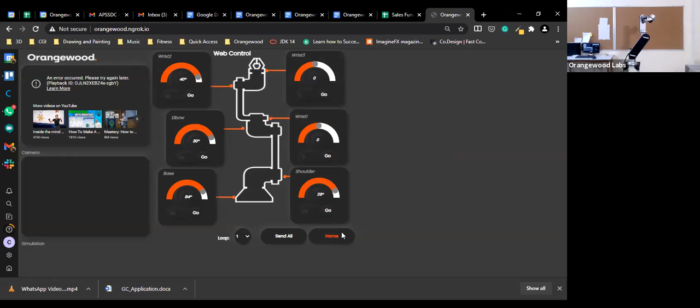So it is as simple as that - it can be controlled even by a person who just knows how to operate a smartphone. And there is this home button which makes it go back to its rest position in which it was before.

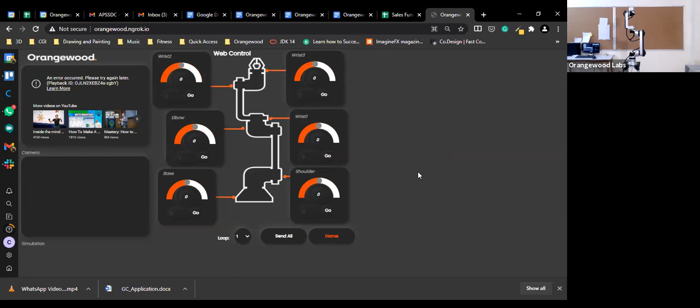I would like you to control this bot, if anyone would like to have a chance to control it, and I can share this link in the chat. Sunil sir, the link is shared in the chat box. You can just open this link and try controlling it yourself from your end. Am I audible, Sunil sir? Audible, sir. Great, you can open this link and try controlling it from your own end.

Right now, we have a few limitations - only one person can control this bot at a time. So I would recommend only one of you control it right now, and after that everyone can get a chance. Is my screen visible, sir? Yes, it is visible. You can go ahead. How can I control this one? Okay.

You can observe here itself, no? Yep, this is just a simulation of the bot, and you just have to give the input. When you press this button, send all, it will move in real time on my camera. Okay, okay. You actually have to switch back to the Zoom meeting in order to see the camera, the robot moving, as of now. Is my screen visible, sir? Yeah, it is visible. Okay.

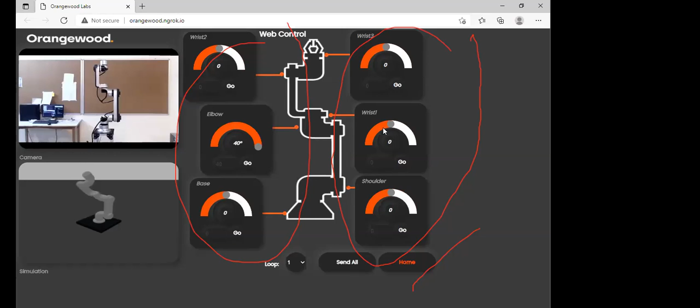Hey, what is this? Sir, can I stop my screen? There is a problem from one other end. Is the screen visible? Sure, sir. Like it is clear, or any obstacles that you see?

If you are done with controlling the bot, anyone else can go ahead and try controlling the robot.

What is this, sir? Loop? So as I already told you, our aim is to make sure that all the repetitive and dull tasks are automated. So what we can do is assign a motion to the robot, and we can assign a loop. If we assign a loop of 2, it will repeat that motion 2 times. If we assign a loop of 5, it will repeat that 5 times. So in order to automate repetitive tasks, we can assign loops to them.

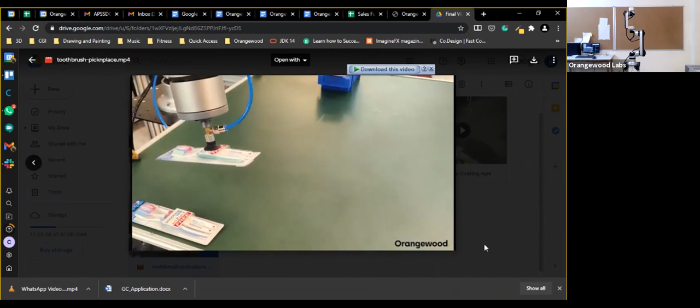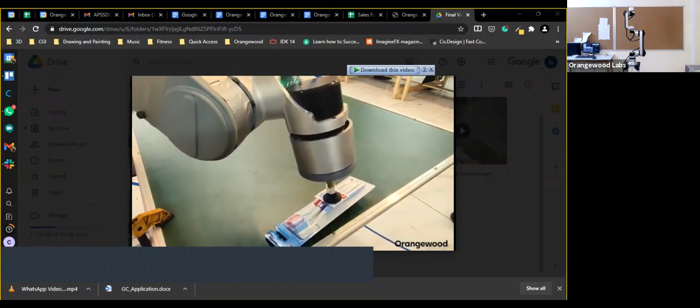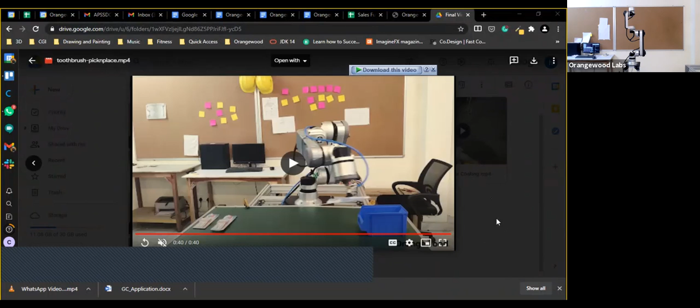This video showed pick and place operations, which can be used in a variety of industries to reduce manual labor for mundane tasks of picking and placing objects from one place to another. Another application is machine welding.

We have tried this out in one of our partner industries, and you can see the video right here.

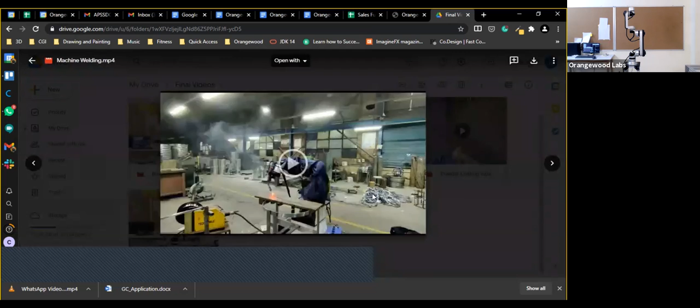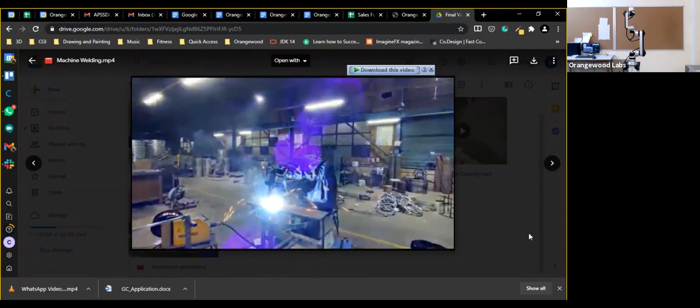Using such features, we can program this robot to do repetitive tasks, such as welding in a particular arc multiple times. This reduces human effort and makes the overall process efficient and easy to program and operate, increasing efficiency and overall productivity manifold.

From these videos, you can see how easy it becomes to automate such mundane tasks and increase efficiency multiple times. With the help of this, we can release human labor from these activities so they can work on better jobs and more important tasks instead of repetitive and boring work.

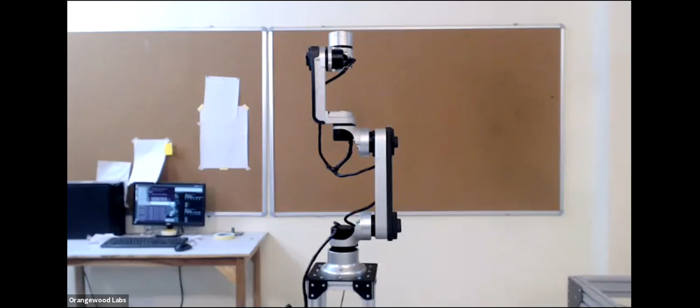Senthil sir, I hand it over to you. Hello.

Session is handed over to Aditya sir.

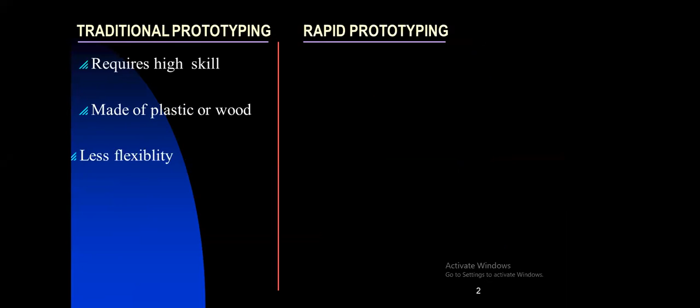Moving forward, what is the difference between traditional prototyping and rapid prototyping? Traditional prototyping requires high skills, is made of plastic or wood, has less flexibility, larger lead time, and is difficult to produce complex designs.

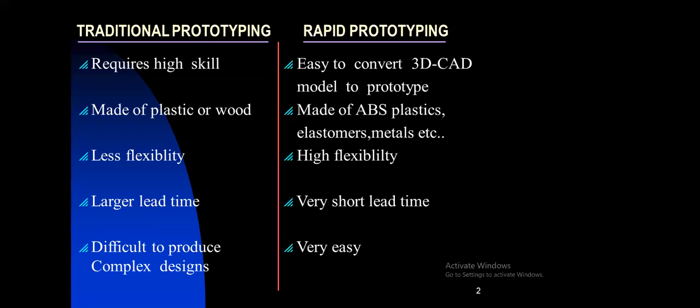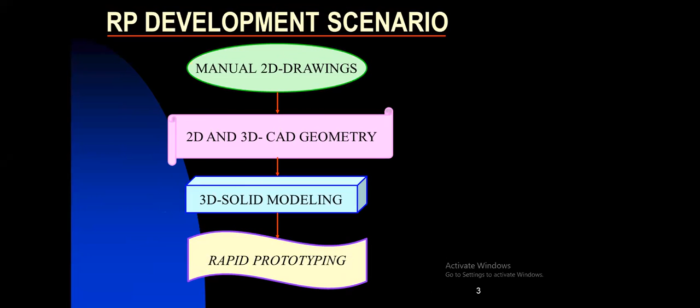As far as rapid prototyping is concerned, it is easy to convert a 3D CAD model to a prototype. It is made of ABS plastics, elastomers, and metals, with higher flexibility and very short lead time. In the rapid prototyping development scenario, first there is manual 2D drawing, then 2D and 3D CAD geometry and 3D modeling, and finally we go into rapid prototyping.

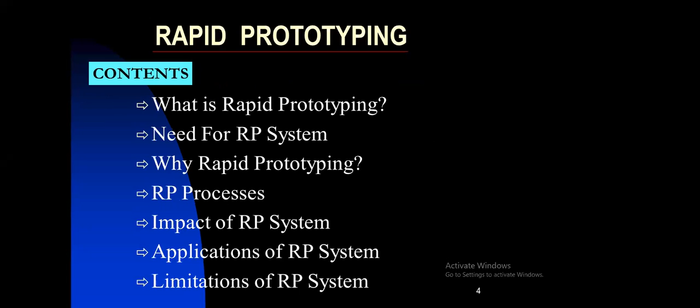So what do you mean by rapid prototyping? What is rapid prototyping? What is the need for rapid prototyping systems? Why rapid prototyping? What are the processes involved? What are the impacts of the rapid prototyping system? What are the applications and limitations of the rapid prototyping system?

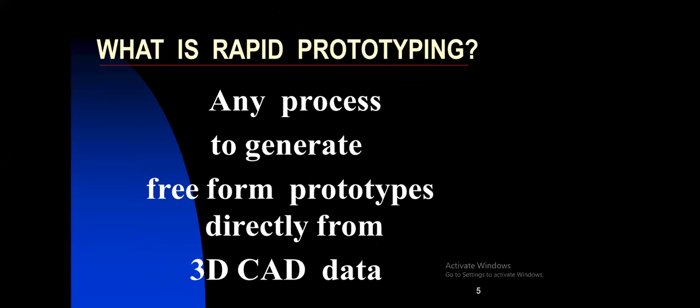First I will discuss what rapid prototyping is. It is any process to generate a free form of the prototype directly from 3D CAD data. First we have to create 3D CAD data, and from that data when we develop the process, it is known as rapid prototyping.

What is the need for rapid prototyping? It compresses the time of new product development and launches new products well ahead of competitors. Before competitors develop the product, we will be able to develop the prototyping system.

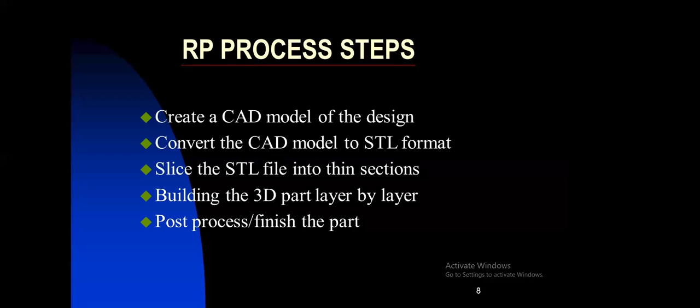Next, what are the rapid process steps of rapid prototyping? First we create a computer aided design, a CAD model of the design. Then convert the CAD model into STL format, slice the STL file into thin sections, build the 3D part layer by layer, and finally post-process and finish the part. These are the rapid prototyping process steps.

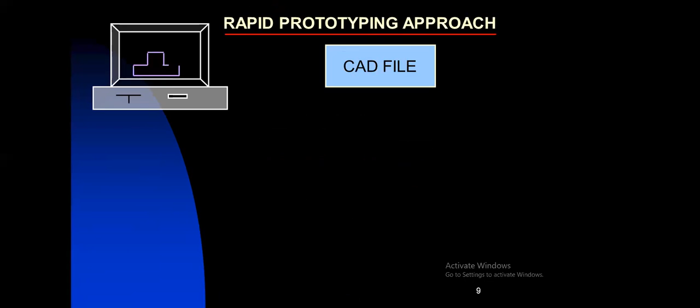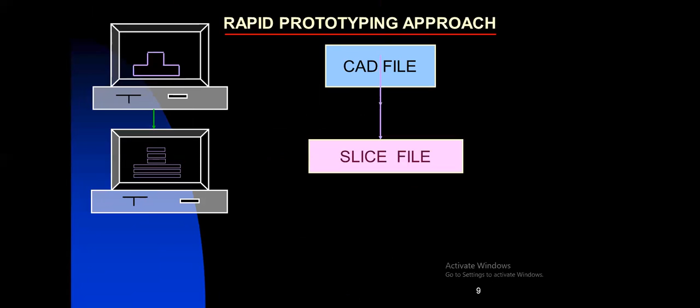So what is the rapid prototyping approach? This is what it shows. We get the CAD file, the computer aided design file, then we get the slice file, then we get the layered manufacturing.

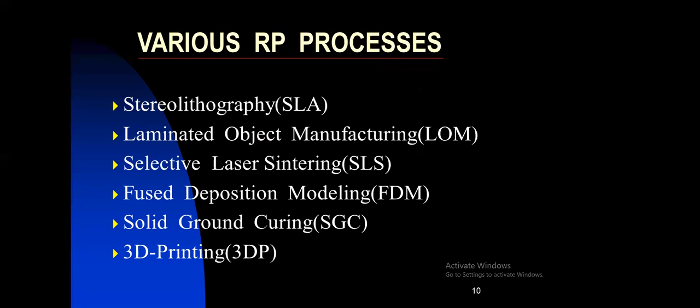Various rapid prototyping processes are stereolithography, called SLA, laminated object manufacturing or LOM, selective laser sintering, fused deposition modeling, solid ground curing, and 3D printing. These are the various rapid prototyping processes.

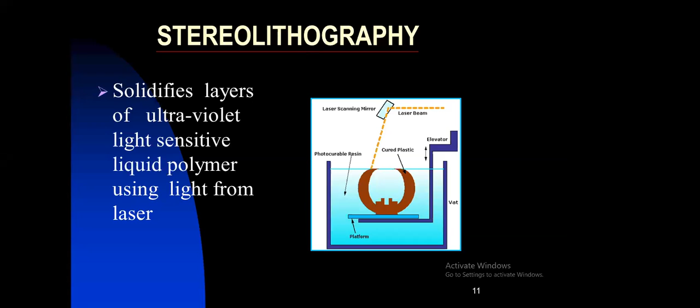What do you mean by stereolithography? It forms solid layers from ultraviolet light sensitive liquid polymer using light from a laser. As seen in this diagram, we have a laser scanning mirror. The laser beam falls on the scanning mirror and then onto the platform, which consists of cured plastic photocurable resin, with an elevator that lifts it, kept in what is called the vat.

Next, what is laminated object manufacturing? Layers of sheets are cut and bonded using a digitally guided laser. This diagram shows a collector roll, a feeder roll, a part block, and a platform, along with the completed layers. The laser beam falls on a mirror, then goes into the optical head which has XY positioning, moving in X and Y directions, falling on the platform to layer outline and cross-hatch part body, making the object.

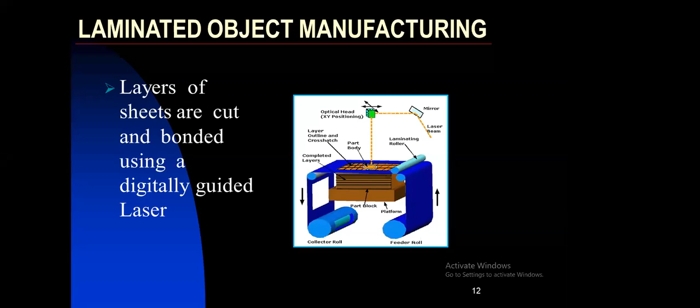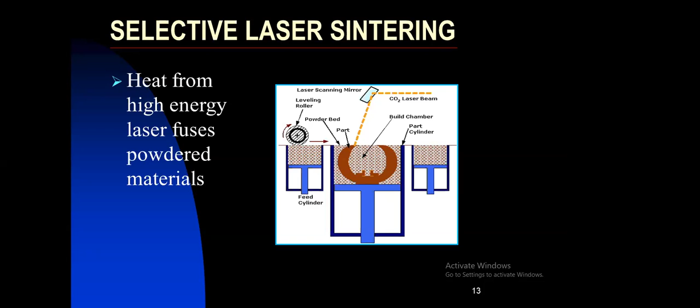Moving further, what is selective laser sintering? It uses heat from a high energy laser to fuse powder materials. This diagram shows the feed cylinder, part cylinder, and build chamber, consisting of the powder bed. The CO2 laser beam falls on the laser mirror and then falls on the object.

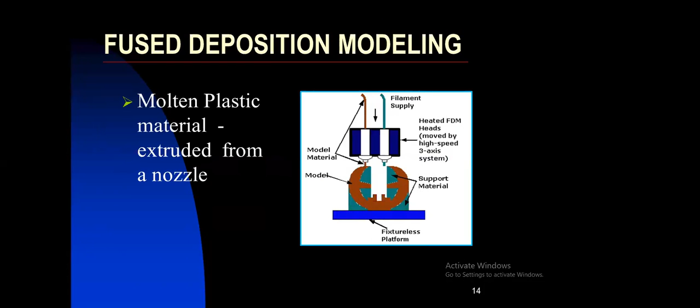Fused deposition modeling consists of the filament supply and the heated FDM head moved by a high-speed 3-axis system, with model material and support material. Molten plastic material is extruded from the nozzle. So what do you mean by fused deposition modeling?

So it turns the computer-aided geometry into the models. It features the breakaway support system, BASS, allowing the designer to create models basically. It also helps the BASS uses a second nozzle to extrude the supporting material also.

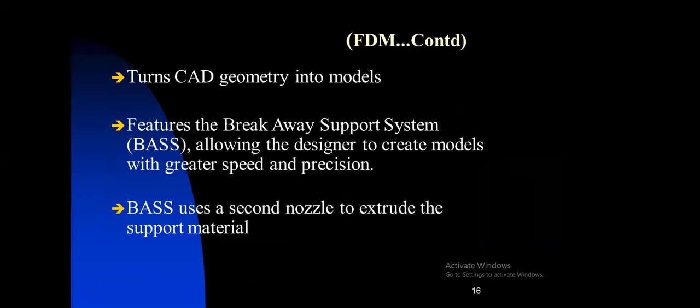The support tip extrudes a material that supports any overhanging portions also. So when the model is completed, the support is easily broken off. The finished product looks better with minimal post-modeling finishing also.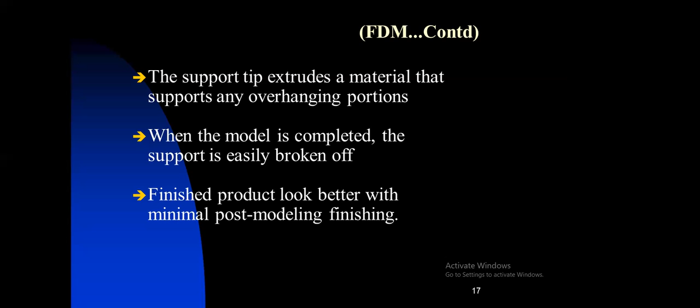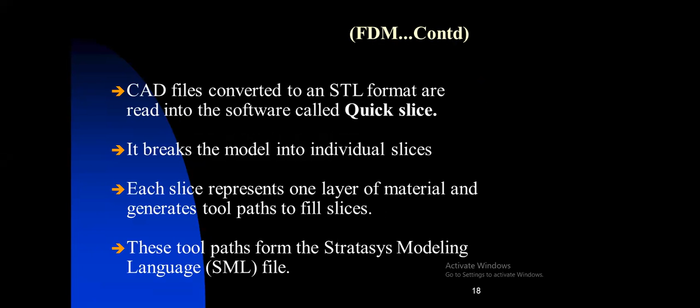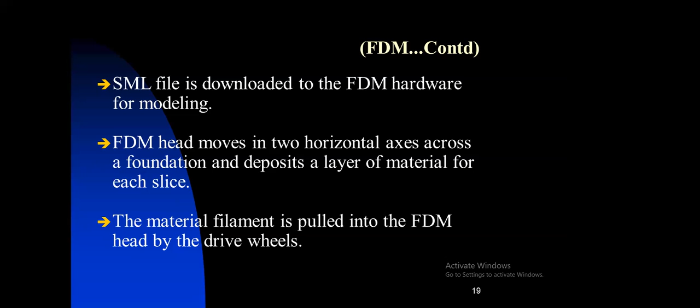So the SML file is downloaded into the FDM hardware for modeling. The FDM head moves in two horizontal axes along the X and Y axis and deposits a layer of material for each slice. The material filament is pulled into the FDM head by the drive wheels.

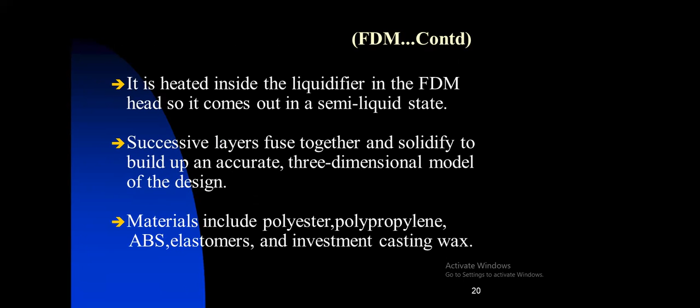It is heated inside the liquefier in the FDM head, so it comes out in a semi-liquid state. Successive layers are fused together and solidified to build up an accurate three-dimensional model of the design. Materials include polyester, polypropylene, ABS, elastomers, and investment casting wax also.

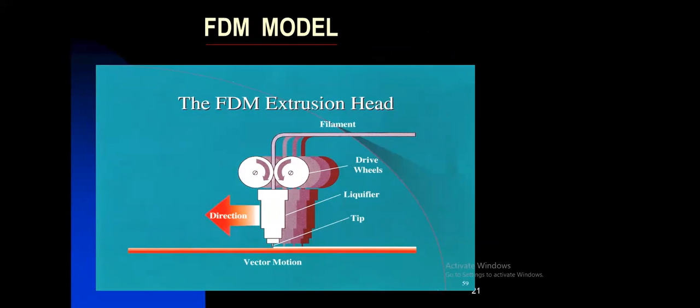So this is how the FDM extrusion head looks like. It consists of the filament, drive wheels, liquefier, and tip also. The direction of movement is along the X and Y axis vector motion.

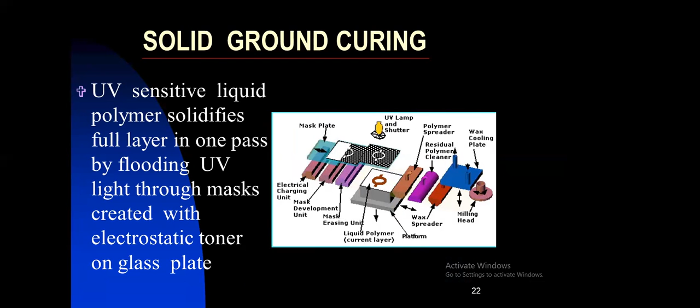So let us now discuss the solid ground curing. It consists of a UV sensitive liquid polymer which solidifies a full layer in one pass by flooding UV light through the mask created with the electrostatic toner on the glass plate basically. So this diagram shows the solid ground curing basically.

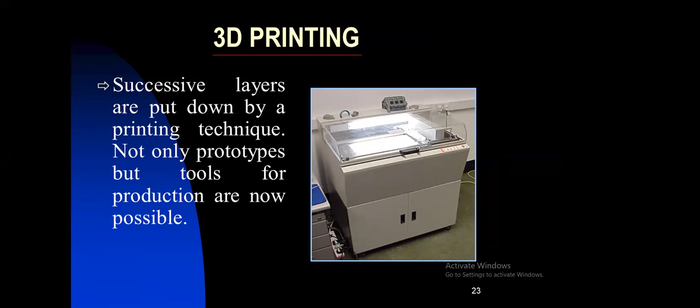And now comes the 3D printing. What is meant by 3D printing? This is how 3D printing looks like. It consists of successive layers being put down by a printing technique. Not only prototypes, but tools for production are now possible using 3D printing. So these are the additive manufacturing techniques, an introduction to rapid prototyping.

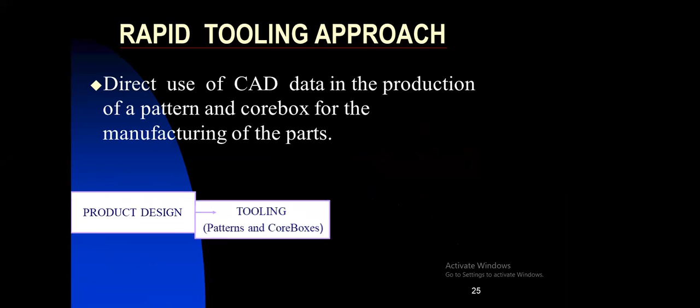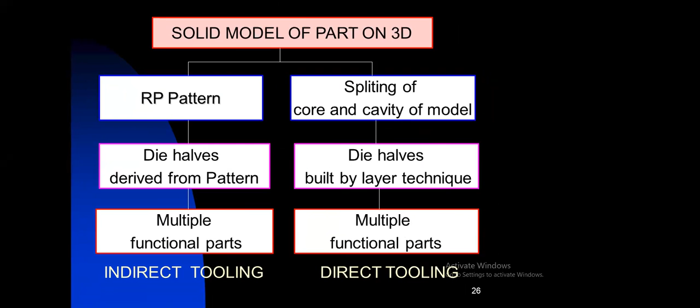So rapid tooling is the direct usage of CAD data in the production of a pattern and core box for the manufacturing process. It develops the product design, tooling, and manufacturing basically. The solid model of a part in 3D, the RP pattern, splitting of core and cavity of the model, the die halves derived from the pattern, the die halves built layer by layer technique, multiple functional parts, and multiple functional parts in indirect tooling and direct tooling. These are the two toolings.